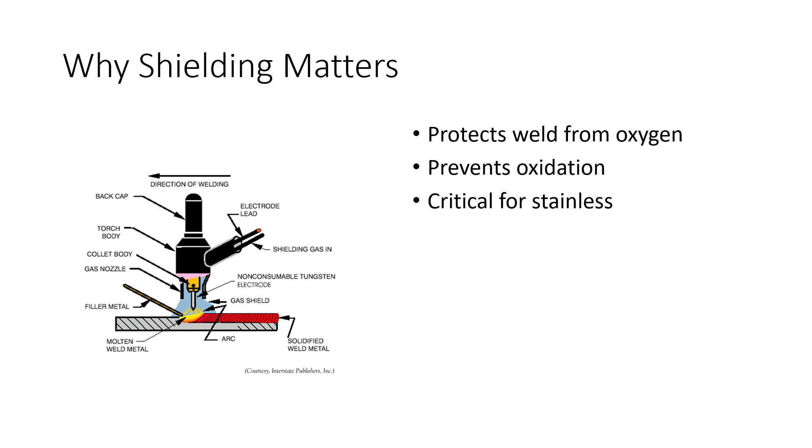So what happens without protection? Oxidation. On the inner root, we get a thing called sugaring. This is a rough, crusty, nasty looking root. And what it does is it means we've lost corrosion resistance. Whatever fluid is on the inside of that pipe is going to chew through that oxidized, sugared root and start wrecking the metal. So that's a bad thing. We do not want that to happen.

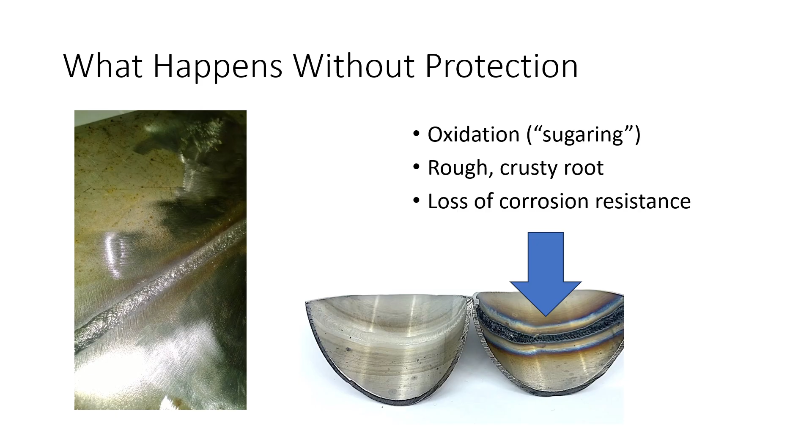So torch shielding, the top side. So we're going to have an argon shield, and that's shielding the arc. It's covering our weld puddle, and it's going to stay over the weld. And a lot of times we'll have a pre-flow when we're TIG welding, and we'll also have a post-weld gas flow. So this is going to just let the gas flow over the weld metal and the solidified weld metal once we quit sending electricity through the tungsten.

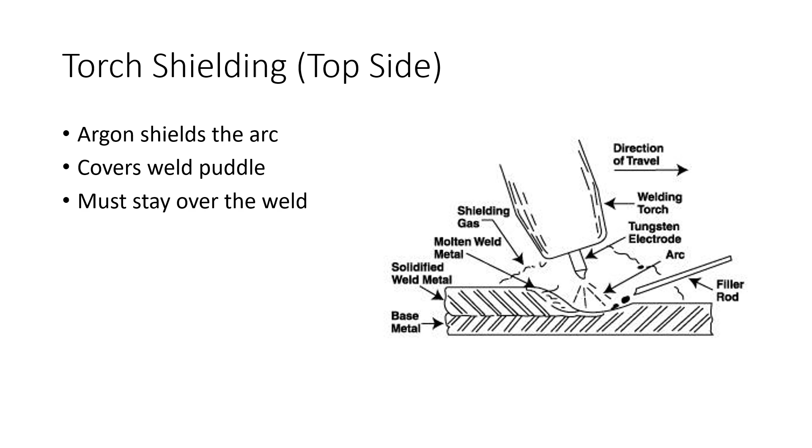So you just hold your torch there for 8 or 10 seconds or whatever the time frame is to let that metal, your stainless steel weld metal, and that heat affected zone cool down enough so that it's not going to be under attack from oxygen and nitrogen in the atmosphere.

So we've got a thing called back purging, and this is inside protection. There's a lot of different ways we can do this, and a lot of different gases that we can use. So there's a whole laundry list of gases that you can use to back purge different materials. So what we're doing is we're filling the pipe that we're welding with a backing gas, usually an argon-based material, and there might be other things in there. But this is going to shield the root side of the weld, not the torch side of the weld.

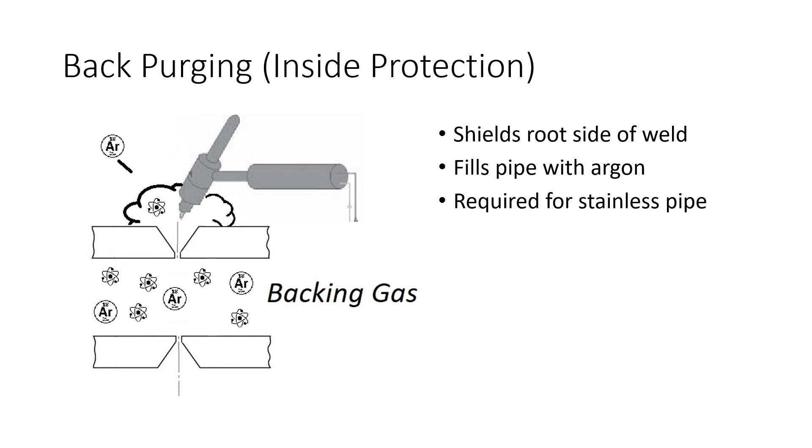It's going to shield that inside of the weld, which is still hot, and if it's liquid metal, it's going to come in contact with oxygen and nitrogen if we don't have that backing gas, that back purge, and it's going to sugar, and we're going to get that oxidation. So we put a back purge in there, and we'll fill the pipe with an argon or some kind of argon mixture. And this is how we're going to do it for stainless steel. Carbon steel, we can get away with not doing this sometimes, depending on our welding process and what's going on.

So what is backing gas? It's the shielding gas used on the underside of the weld. And like I said before, it protects it from atmospheric contamination. We use it generally for gas tungsten arc welding, or if we put the root in with gas metal arc welding or plasma arc welding. Plasma arc welding and gas tungsten arc welding are pretty similar, but it protects that backside from atmospheric contamination.

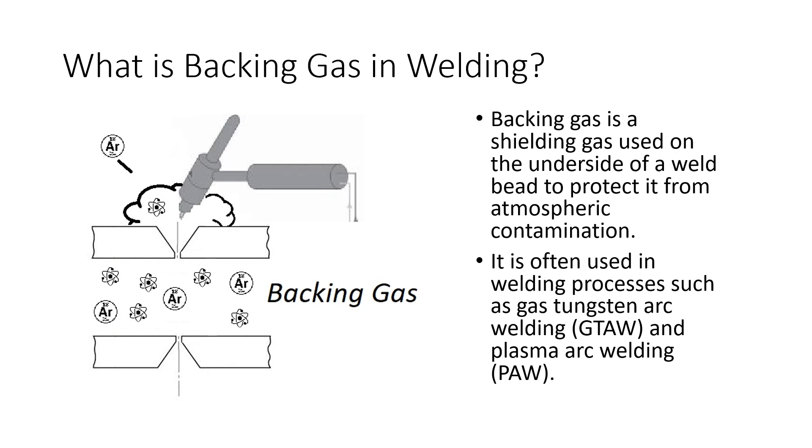So one of the things when you qualify welders, and this is just kind of a little side thing, is if you qualify a welder to weld with no backing gas, they can weld with backing gas. But if you qualify the welder with backing gas, they can't weld without a backing gas.

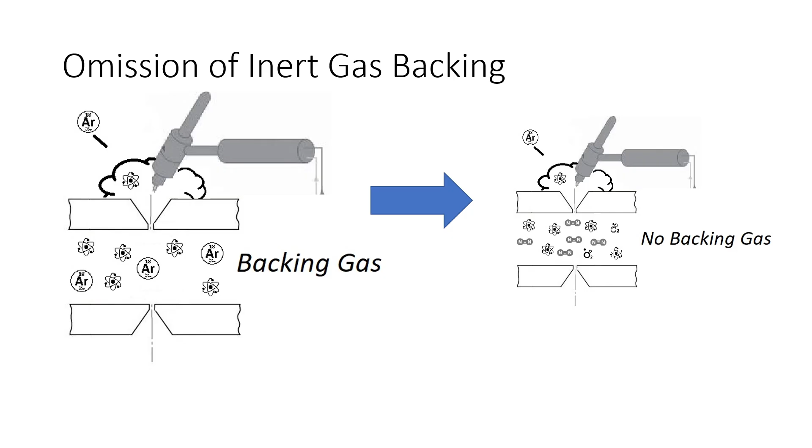But anyways, in this picture here, you can see the difference. I tried to put together graphics that show the backing gas. We've got argon on that left side. And then over on that right side, we've got nitrogen and oxygen and whatever other constituents are floating around in that gas in that pipe there with no backing gas.

So good root versus bad root. Good root is going to be smooth, shiny, good. Bad is going to be dark, crusty. You can see the picture here. That's going to be bad. The color is going to tell you the story on what that weld bead is ready for.

Do we need to cut it out? Is it just burnt and nasty looking? Or is it nice and shiny in there and got a good contour? Gives us an idea of what we can do with it, what our end disposition is going to be for that thing.

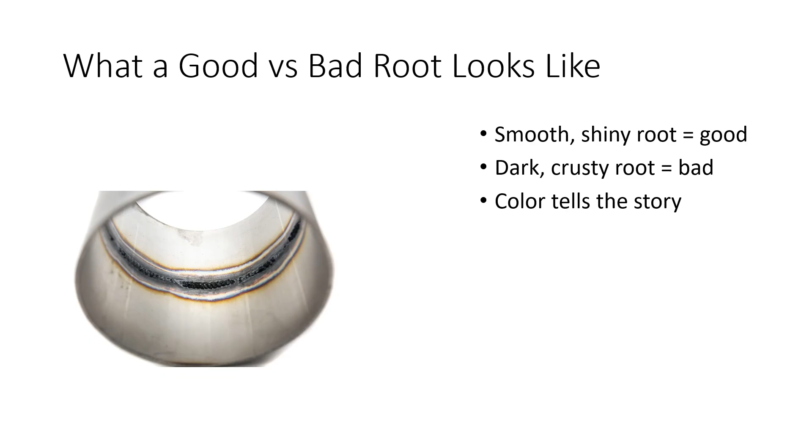So a simple purge setup, there's different ways to do this, depending on what you've got going. You're going to seal the ends with tape, plugs, dams, whatever. And you're going to feed argon into the pipe. And then you're going to use an oxygen monitor to figure out how much oxygen is in there. Because a lot of these things have a specification that says your oxygen on the inside of that pipe has got to be a certain number or you don't weld.

So, we usually leave a small vent hole for the oxygen to escape from. And this is a good idea. You can have these big purge dams. Sometimes they put rice paper purge dams in there because you can't get the purge dam out. So they'll put rice paper ones in there before they fit the pipe up, and then they'll run the purge gas in there. When they run water or hydro it, the rice paper just dissolves. Life's good. We move on.

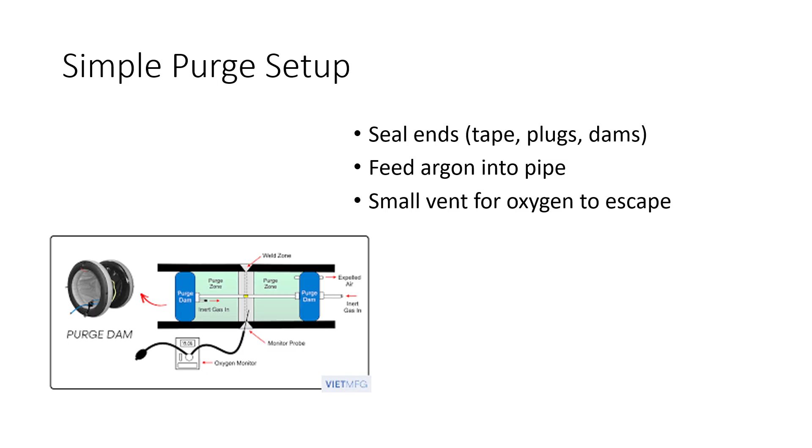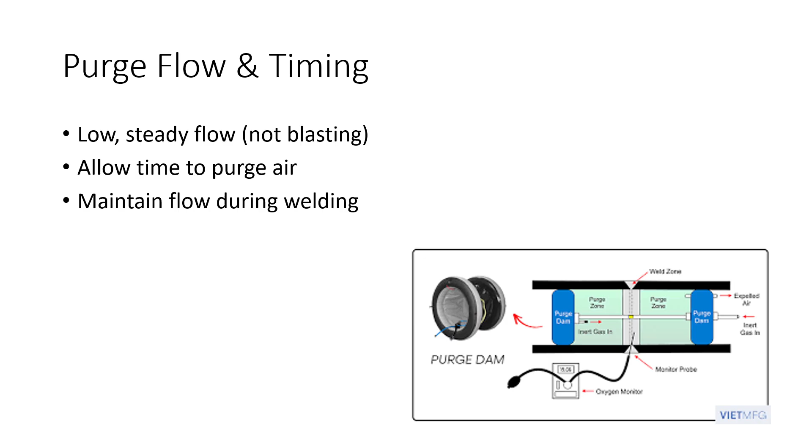So with a purge, we want to go low and a steady flow. We're not just blasting this in there because you're going to get turbulence. You're going to suck more oxygen and nitrogen in there. We just want to go low and slow. And we want to allow time for the oxygen and nitrogen to be able to find its way out. And once we start welding, we're going to maintain that purge. The flow is going to be maintained while we are welding.

So common mistakes. We forgot the purge. No purge, we don't need a purge. Well, that can get ugly and we can have to cut welds out. Maybe there's a leak in the setup somewhere. Some of your purge dams, hoses, whatever. We can have leaks. Bad things happen. We start welding too soon. We put the purge in there, but then we just started welding.

Too much flow. We put way too much gas in there. We're going to get a lot of turbulence, and it's going to look nasty. We're going to get contamination. If we have too much flow, it's going to pull oxygen and nitrogen in there, and it's going to contaminate the back side, that root side of the weld puddle. We're going to get sugaring.

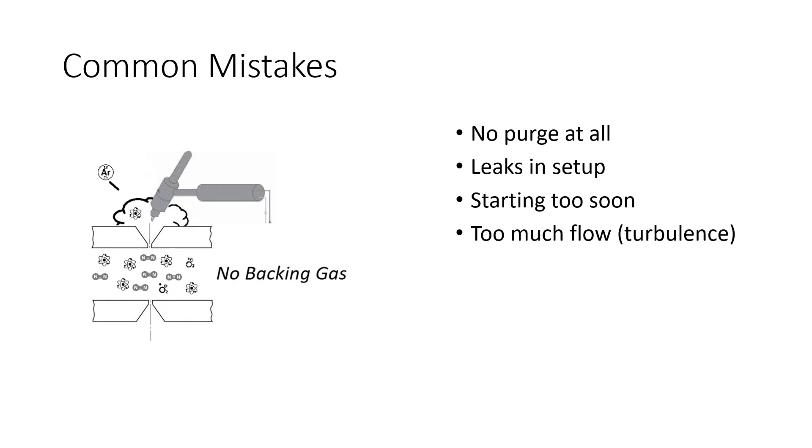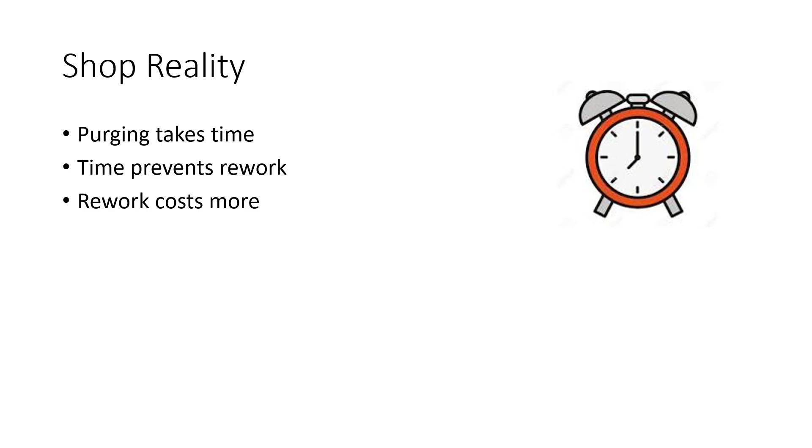So the reality of this, purging takes time. Time prevents rework, and rework costs more money. And I know I'm not saying anything that we all don't know, but that's where we're at. We need to remember this. Bottom line, no purge, we're going to get a bad root with stainless steel. Bad root, failed service. So we need to do it right the first time.